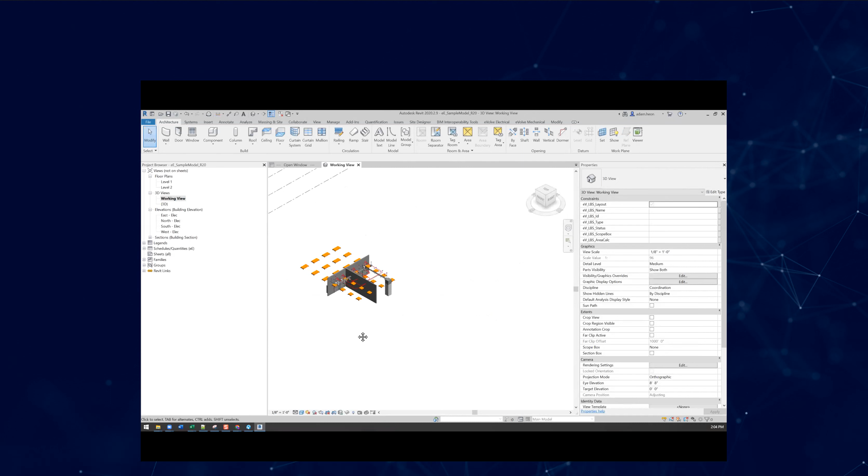The model that I'll be using is that sample model. I'll typically use this model just to show what some of the configs are as I'm using it, and point out some various settings and how you can use it. The nice thing about this zip folder - we'll probably have to put an update date on this, or a revision, because we'll update this maybe monthly or every 6 weeks or so, since we're always trying to build out samples and new things. So if we can share those examples with everyone, I think it's a good method to do that.

All right, so getting started. One thing you'll notice here is the Foresite properties has changed with 6.0. There's a couple of new panels down here, the materials and locations. So these are the two things I'm going to specifically go through, and I'll show how the website utilizes those tools and so on.

So where we start is in the website. What I'm going to do is start a new project.

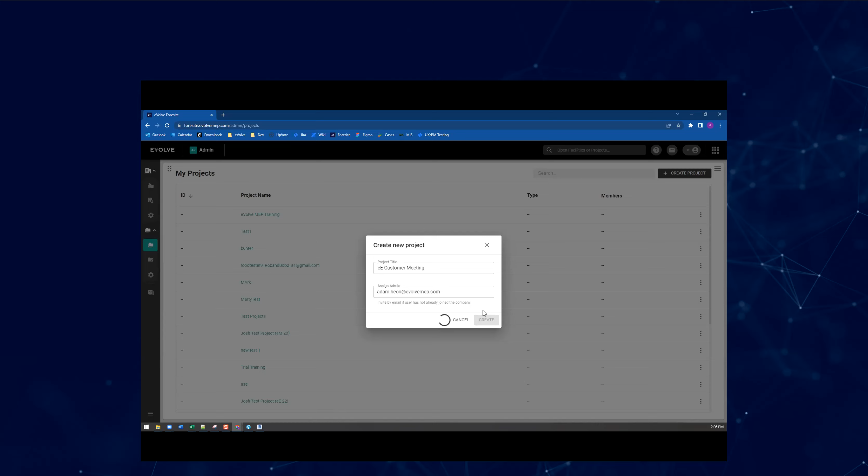All right, so what I can do here is go to the eE customer meeting. I can go up to this top drop down here to activate that project, and then I will go to the design module.

Anybody who has a Revit license automatically gets this design module up here with these nav items. The design module is basically the module for Revit users. It's going to have various types of tools we develop. Each different module contains a series of tools that talk back and forth, and some of those tools are redundant across different modules. So this is one of them.

This is basically the Revit users area. It'll be very similar to what you saw in admin, where I have some company information and project information. Below that is where you get into the specific tools. Again, this is more like our initial release. As we go through, every couple of weeks, 2 to 4 weeks, we'll be pushing updates to this, so you'll start seeing new features coming in here. I'll utilize meetings like this to bring everyone's attention to it.

Right now we have, like I said before, the materials and locations options here, and I'll show how those come together. So I'll jump over to my locations module or nav item.

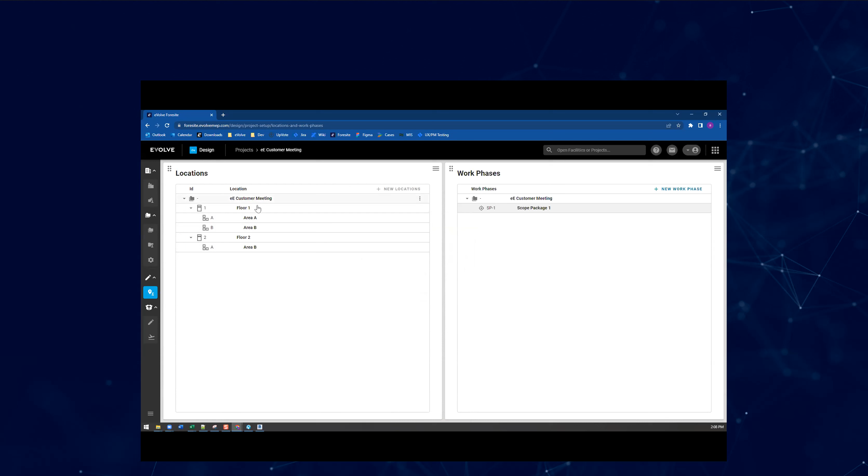So what I'll do is create a real basic one where I'll have floor 1 and floor 2, and I'll put an area A there and an area B here, and so on. The basic idea is you just create these parent-child rows. They're geared towards floors and areas and things like that you'd use in construction. But you get the idea - this could be as granular as you want, down to the room level. But just to get the point across, I'll create a simple 2-floor building, area A and B.

This one could use a... oh, let's see what I did. B. Okay, so I have the breakdown structure here.

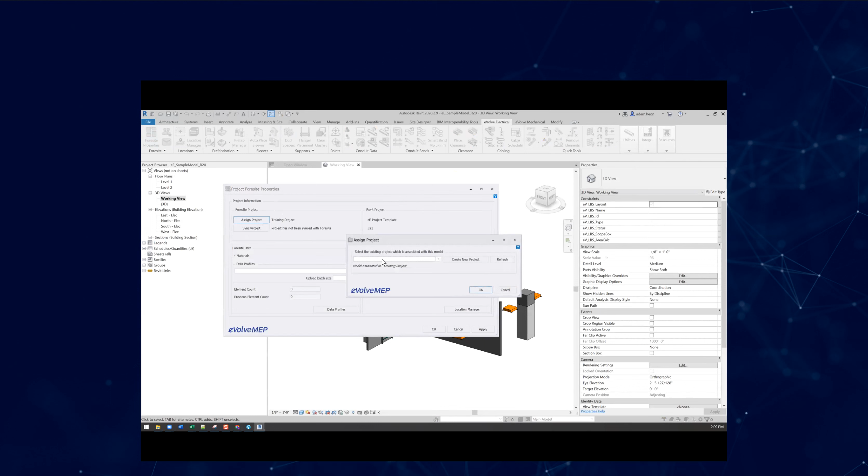Once this is created, I can bring this structure into the Revit project and start linking my locations within that model. So what that looks like is when I'm in my Foresite project, the first thing I need to do is assign my model with that new project I just made, which is right here.

I'm going to shut off my materials panel because I'm not going to use that right now. I'm just going to deal with this one, apply my changes, and sync the project.

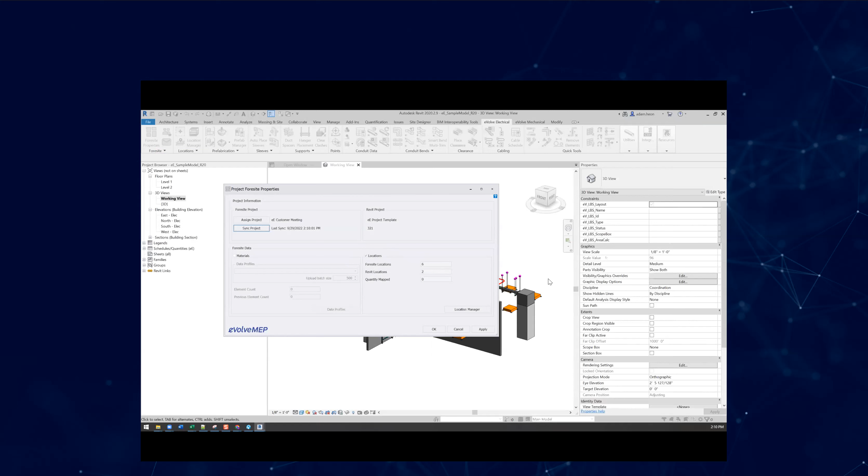So basically what I did is bring that structure into the model, and you'll see it lists out how many location nodes you brought in. It also displays how many are in the model and how many are mapped. So the locations that came in are 6. If I go back to the site, you see 1, 2, 3, 4, 5, 6 - basically each node is a location. The Revit locations are 2, so in this sample model I just have 2 of the square little location nodes, location boxes placed in the model. That's what that number represents.

Quantity mapped is basically how many of these are connected. The way you connect the two is you go into your location manager. You'll see there's my B1, C1 location, and I have a column here called Foresite locations. So when I drop this down, I see a representation of that same structure.

In this example, I can say, okay, that's B, and I have C1, and I'll just call this A. So I'm just connecting the dots, saying I have a boundary established in my model, and it's part of some location structure of this project. The website facilitates the creation of that structure, and we're just aligning the two here.

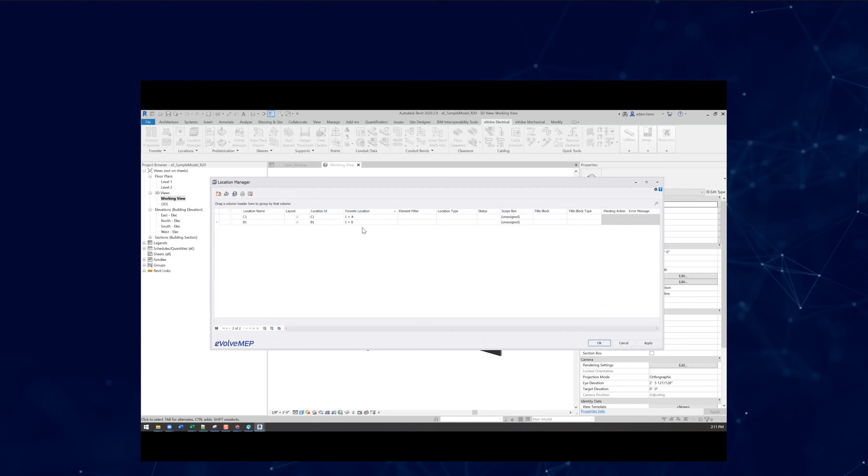So once I hit OK, you'll see it'll say I have 2 mapped. One thing we didn't automate is the assigning, because it allows you to be very versatile on the Revit side - you can call these locations whatever you want. So it just gives it that more manual alignment here.

So what I want to do now is basically do an assign location. This will just assign all the elements within those boxes.

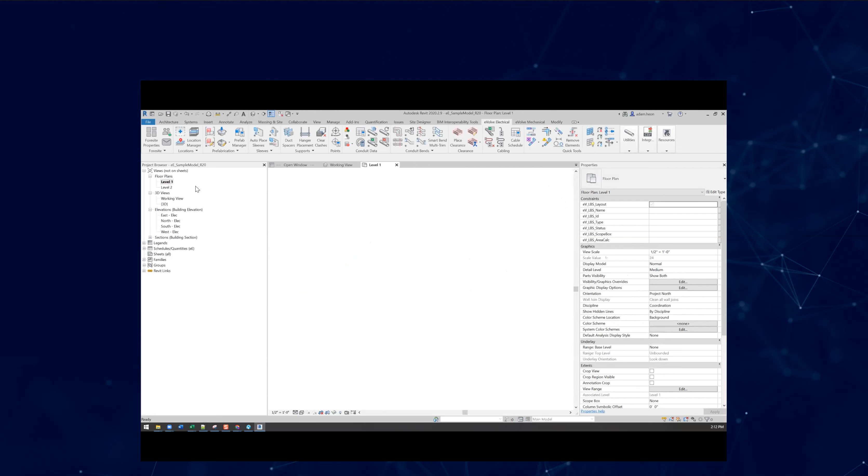I'll jump to the floor plan view once this is done. Can you see those? So there's one of those, and there's the other one. You can see them in my 3D view. You can't, actually, I have them turned off.

But if I click on an element, what you'll see is we have two project parameters here. The LBS ID, which is the identifier you called the location box, and then your Foresite ID, which you can see is that same location structure typed out. This is just written to the elements for additional filtering or tagging.

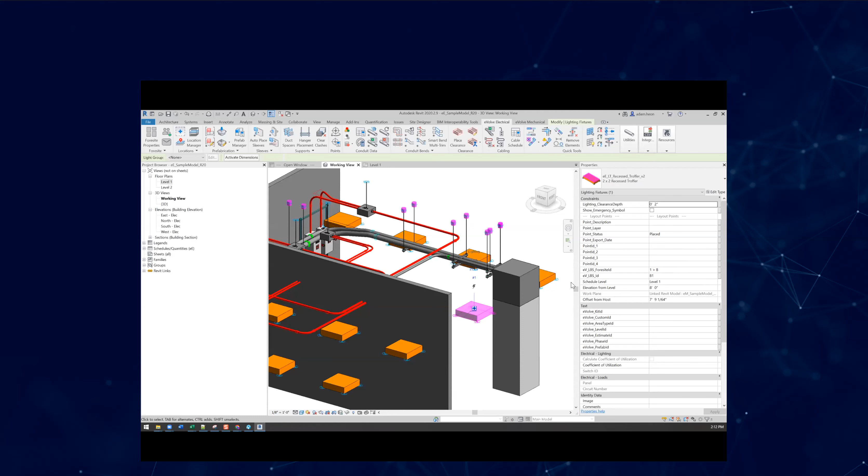So I have my locations assigned, and then I have all the locations mapped. So the next piece is the materials module, which is represented in the takeoff nav item here. We're calling this a takeoff pad, or the takeoff nav item.

Basically, it's going to be a series of tools to do various takeoff functions. One of those things is taking Revit information as far as quantity takeoff and processing through it. So if you wanted to export a list of your underground conduit, you can get those quantities into this area, move them over into a takeoff pad, and start working the quantities, rounding them up and doing that type of thing.

So there'll be a lot of tools coming in, but the initial release of this feature basically will pull the data from Revit and populate it in a grid. You can start to organize it a little bit, but there are still some features that aren't all there yet. So it's really just bringing the data in at this point. I'll show you what that looks like here.

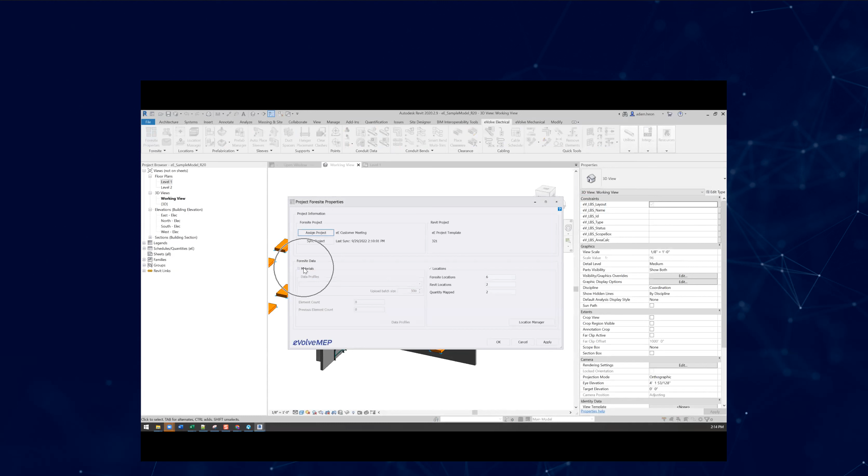The way we do this, we jump to this module and turn on the materials panel. You'll see we use data profiles. Last customer update, I went through a bunch of this with the profiles and how that's put together, so I'll touch on it again for those who weren't there, but won't spend too much time on it. Basically, you can assign one or more profiles to this config here, and then when you do a sync project, it will bring the data in.

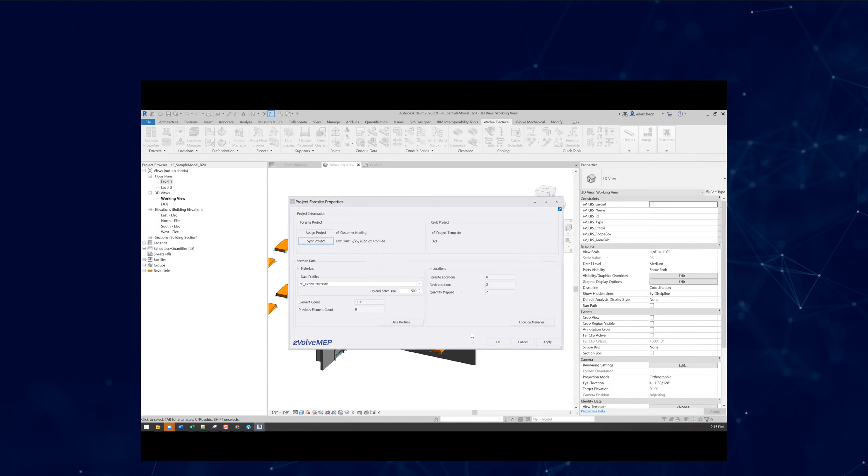So I'll sync the project now. Oops, save my changes. I'll sync the project, and then I'll actually do a couple of things with the profile so you can see how you can align some parameter data from the elements to the website. That's successful, hit OK.

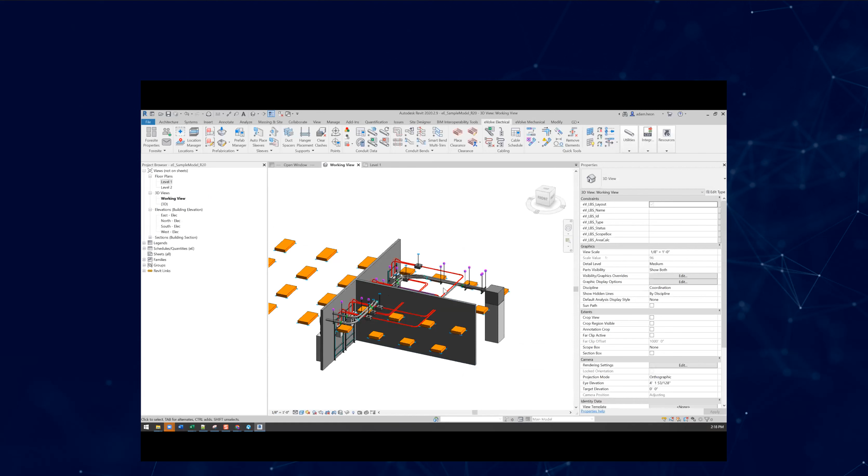So hopefully that makes sense, and you can start to see some of this functionality that we've been talking about over the last couple of months start to come in. So what I want to do is jump back to the model and start tweaking some of the information.

I'll take an example for hangers that I was thinking of today. Let's say you had some custom hangers, or you want to create a unique profile for hangers because it has some different information you want to capture. So what I'll do is modify this profile so we can separate these out, and then I'll show some of the parameter sync things we've put together for our hangers that might be applicable.

So I'll jump into my data profiles and find my evolve material profile. Again, this is the one that's in the sample model. Everyone that opens up this model can be doing everything I'm doing right now. So I'll click on this evolve materials.

I'm going to copy it here and rename it. I'll call this material—actually I'll call this hanger assembly. Let's do it that way, and I'll keep this as is. So let me jump to my hanger assembly.

The big thing with a profile, just to cover some information from last time, there's two main parts. Think of it as a method to create a containment of elements within a model and then do something with it. A bunch of our tools are using profiles now, and this is one of them. Once you grasp the concept of the function and how you can specify what parameter information you want to use, it starts to really make sense, and you can start taking advantage of these tools. There's a lot you can do with them.

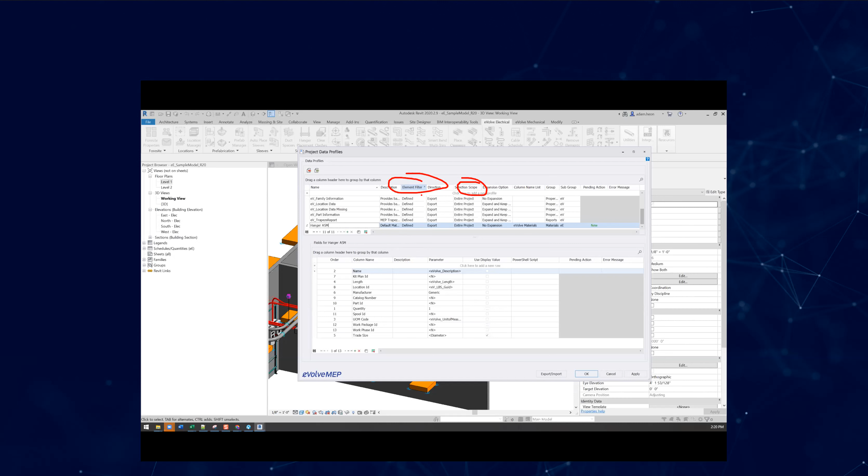But the two main parts are your element filter and basically your selection scope. The element filter obviously defines what you want. Selection scope basically defines where you want, or what exactly you want, what aspect of the project you want—entire project, by view, by selection, etc.

So for the element filter on this, what I'm going to do is—really don't need all that, just need my conduit fittings. I'll use evolve category, I think it's going to equal... to constant. Oops, I think it's under hangers. I should not need any of these. I'll do that for right now and see what I get.

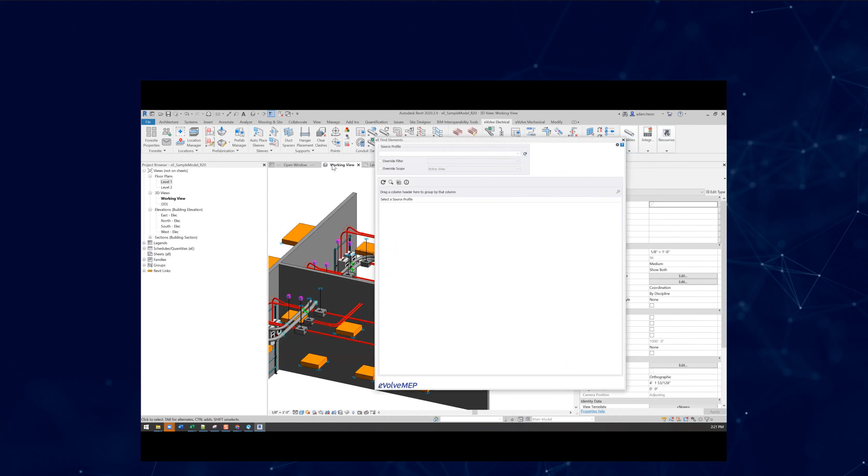So one way I can test this profile out is use our find elements feature. When you first open it, make sure you hit the refresh button so you capture all the profiles from the open project. This is a dockable pane, so that means you can have multiple projects open, and you got to make sure you're pulling the profiles from what's active.

So I'll find my hanger assembly here, and I'll just run the script. And there's all my assemblies—all the assemblies I captured that have hangers. What I don't want is these rod assemblies, I just want these trapeze ones here. So what I want to do is look for one more filter here that I can use.

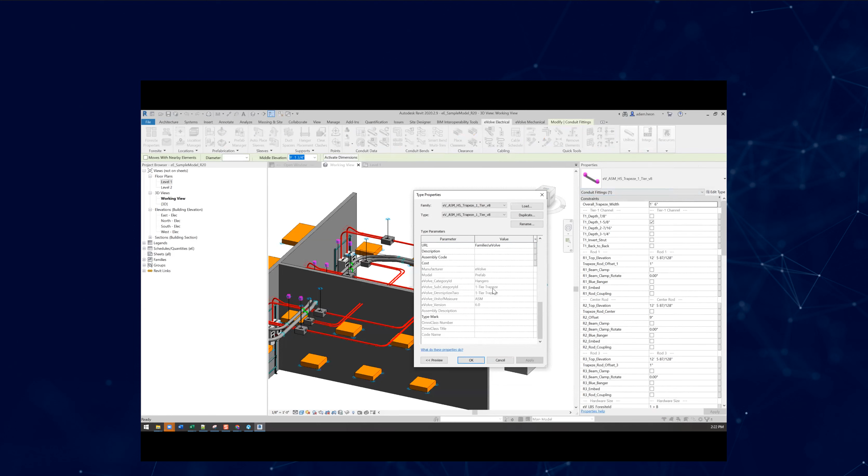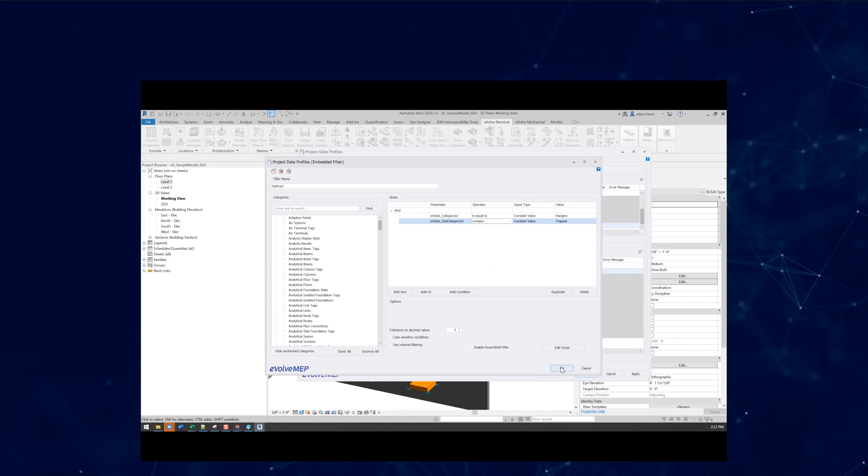Let's see, hangers will say subcategory contains the word trapeze. That'll narrow that search down. So I'll jump back into my element filter, add a condition for evolve subcategory trapeze, and we got to say contains. Alright, so I can jump back over to my tool here, just do another refresh, and there's my assemblies.

You can use the settings—I just, for whatever reason, closed out of it. You can use the settings sprocket here to jump right to the data profiles from that panel, so you don't have to close out of it like I was doing.

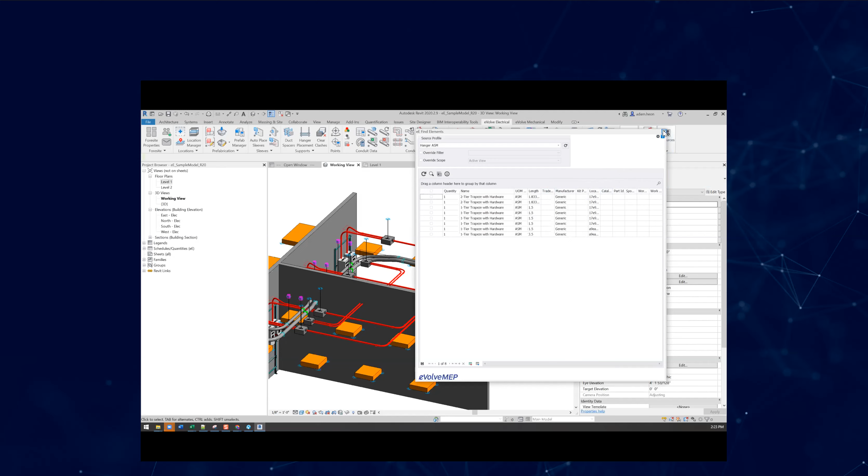Alright, so now that I know I've captured this, what I want to do is use my catalog number field and come up with a catalog number for my hanger assembly. A common method for fabricating trapeze hangers, or a lot of different types of standard components, is creating catalog numbers. The catalog numbers describe what the part is, the configuration of the part, and it helps you build it.

Think of a light fixture or any other tons of products, they have it. I always think of light fixtures because they have the same assembly codes for all the different options of your lights—what wattage, lamp style, and all that kind of stuff. Same concept—we actually created a sample script here in Parameter Sync that will create a catalog number for hangers.

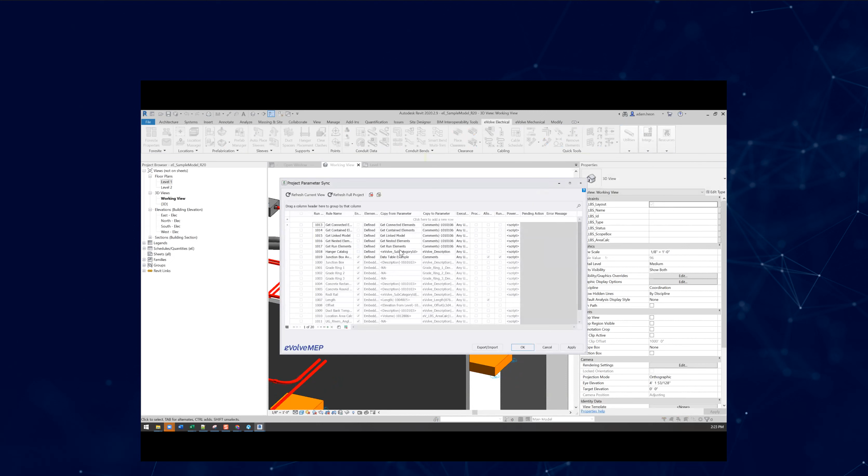So I'm going to write this to my evolve description parameter, and we'll take a look at the script real quick so I can show what that looks like.

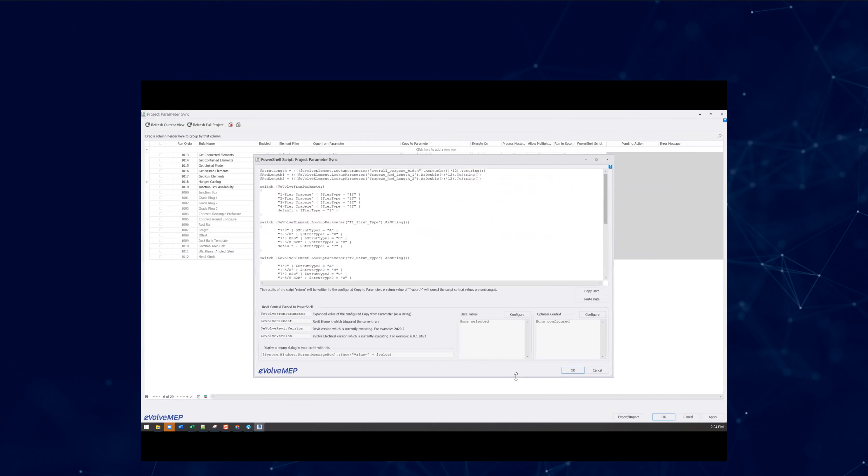Basically, we're utilizing PowerShell here to grab a few variables from the family, rod lengths, trapeze width, and we created a series of options here and defined what the nomenclature is going to be based on different values.

In order to do this effectively and not have some crazy thing going on, you've got to standardize, or at least the more you standardize, the simpler this can be. This is a definitely overly simplified version of it.

Again, it's really just a matter of how many different options you want and how many available sizes or options are within that. The idea here is I'm taking a strut type, here's all my different strut sizes, and this is the nomenclature it's going to be. So if I have a 1 5/8 trapeze, it's going to have a letter B in the name.

Then I get into the bottom here where I'm basically stringing together all these different values. So this determines your end catalog number. You can kind of read through this: tier type, strut type, strut type 1, strut type 2, strut type 3, etc. Then you get into your length and your hardware, your rod lengths. This would be unique per company, but again, it's a good example here.

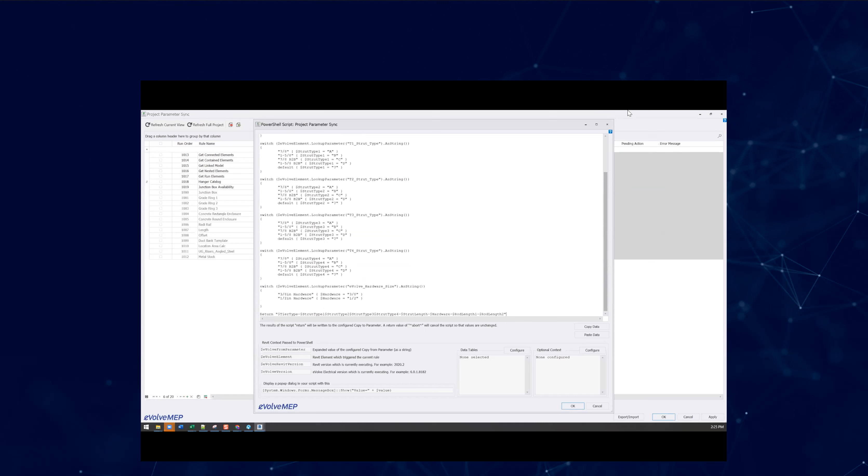So hopefully when you get a chance to look at the sample model and look through this, maybe you can utilize it. And if not on hangers, you could do it on any family. So anyway, I have this parameter sync. I'm going to enable this and then apply my changes and refresh my project.

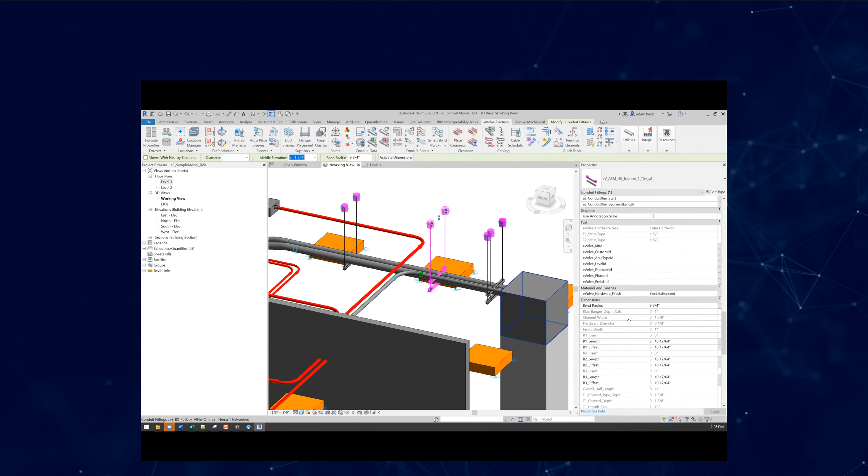Now when I click on a hanger, I'll just double check my evolve description. Did I go by it? There it is, evolve description.

So actually, so funny, my rod lengths here are coming in as a fraction. This is decimal feet, so it's coming in at fraction inches, or decimal inches, I don't know, looks like decimal inches. Yeah, 46. One thing you can do, you could definitely modify the script to fix that.

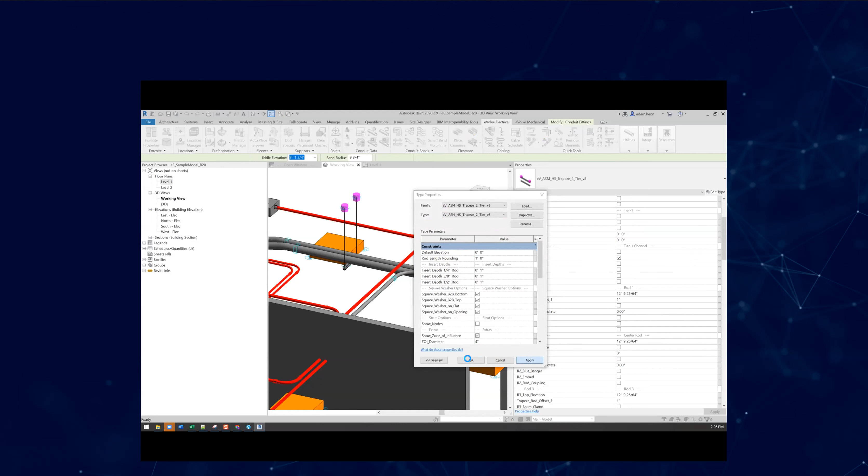But a nice feature in our families is we have a rod rounding length. So if I wanted to round to the nearest foot on the rods, hit OK here. It should actually trigger the script to run. We'll see, may have to do a refresh.

Let me just do a quick refresh on the sync rule. So I'll select my hanger catalog. There we go, 48, 48.

So this is a 2-tier trapeze, BB. I think 1 5/8 for both of those. 22, I forget what that is, might be hardware or something. And then you have 48, 48 for the rod lengths.

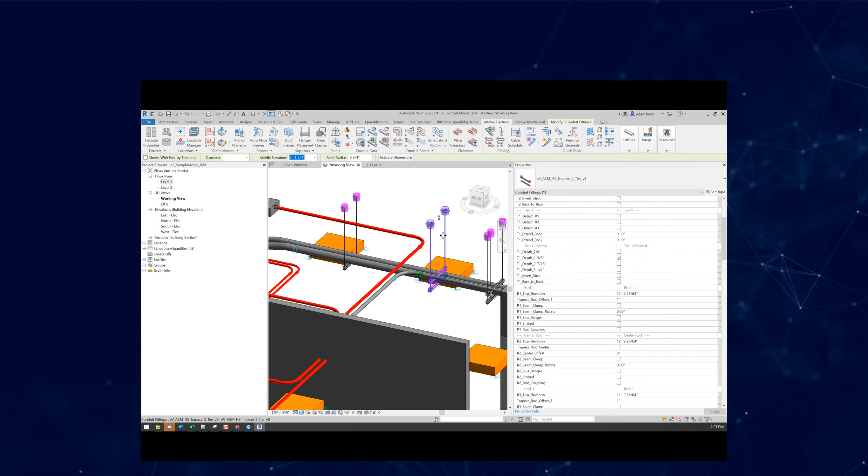So again, the purpose of this is I want to send an itemized count to my takeoff pad with these catalog numbers. So I'm going to jump back to my profile.

And for catalog number, the parameter I want to use is evolve description. And for my name, I want evolve subcategory, maybe subcategory ID. Put it in brackets.

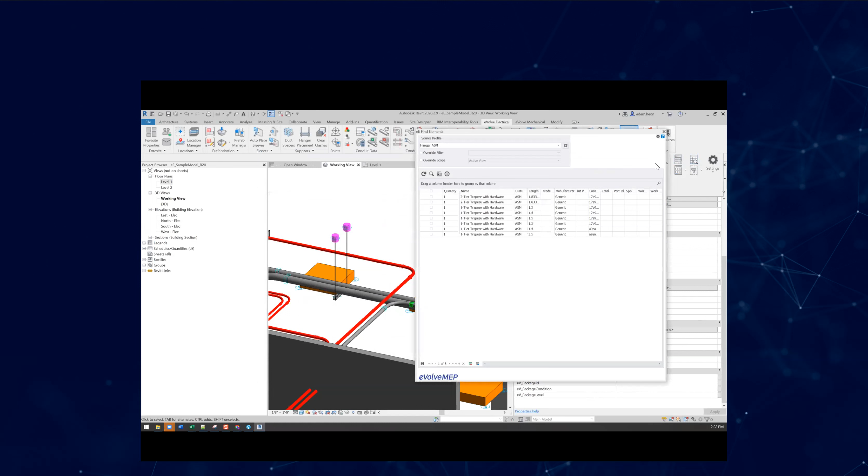So what I will do to test this out is go back to my find elements feature, refresh this. Oh, I typed in the name wrong there, but I want to look for my catalog number right here. And now I'm getting my different catalogs.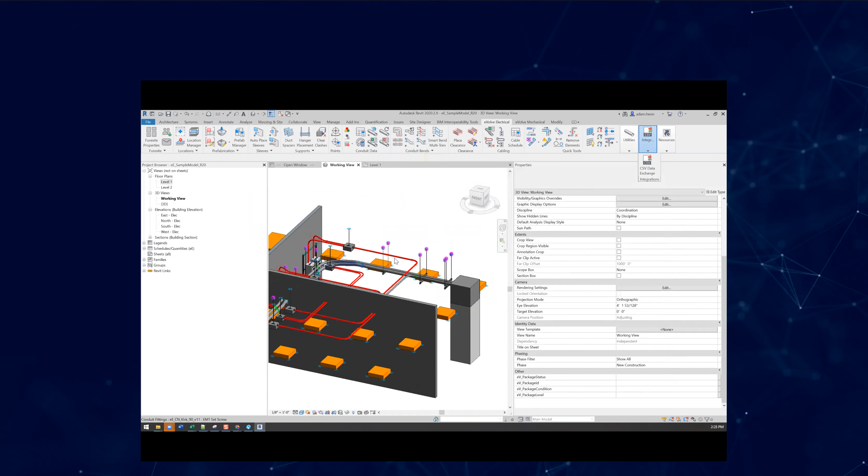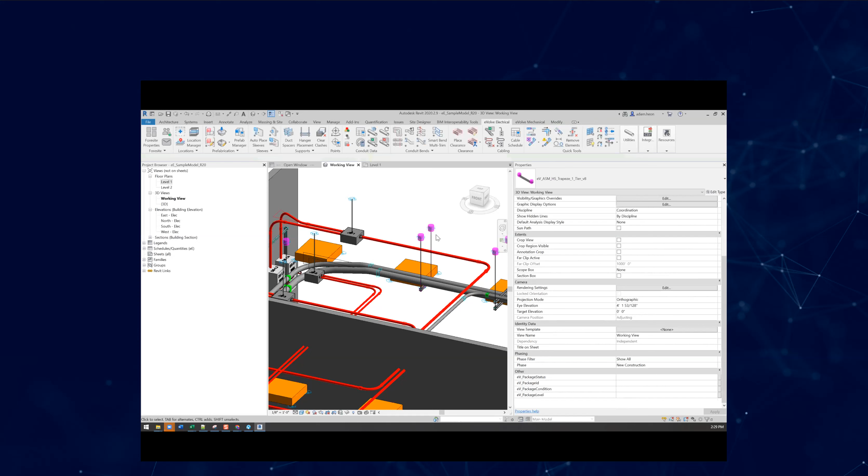I guess my 1-tier, I did not update those, but I will do that right now just to get it nice and clean. My rod rounding, 1 foot. Process through these, and I'm just going to select them all and bump them real quick, just refresh them. There we go.

And I will go back and fix my typo. Oh, so it's not in brackets, that's why it returned that. So I should just be able to select that, hit OK, jump back to my find elements. I don't know why I keep closing it. There we go. 2-tier, 1-tier. All right.

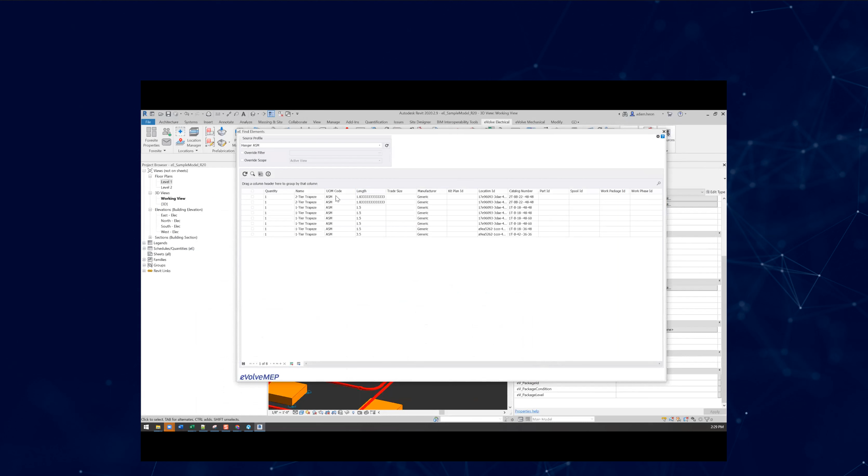So I've reconfigured my profile. I basically just put a catalog number. You'll see when I jump back to the table here, I don't have those catalog numbers or anything like that. One thing I will also do is our unit of measure code just has to equal each. So I'll just hard code that as each and hit OK.

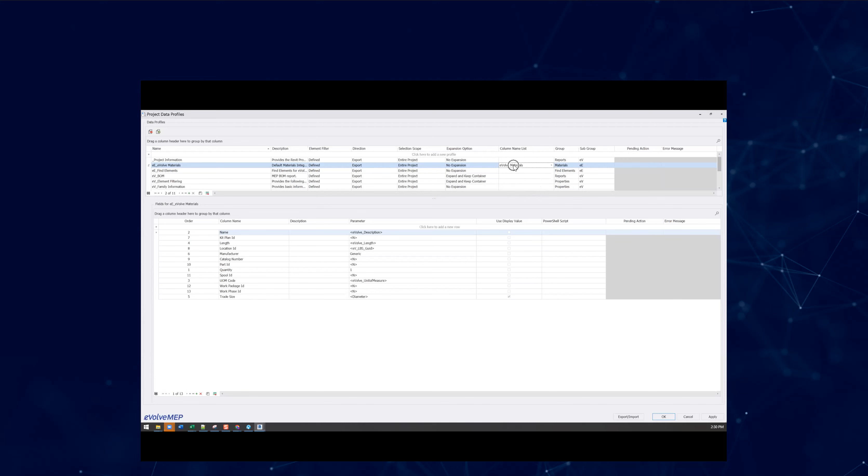All right, so I got that configured. I'm going to go back to my Foresite properties and add my hanger assembly profile. What I probably didn't mention, when I drop this down, you see there's just 2 profiles available, even though in my model I have a lot of profiles. What puts a profile available here is the column name list column. This is where you define your integration. If we don't have any integrations on the electrical side, mechanical, we have the pipe server one, that's where it shows up. But by defining evolve materials here, it puts it into the list over here. So I'm going to hit apply, and sync this one more time.

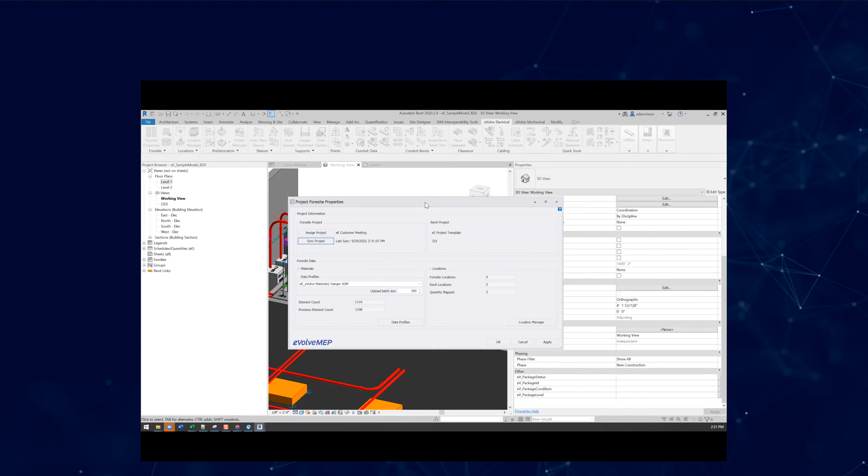All right, so you'll see the element count went up because I was actually filtering out the assemblies in my first upload, so the count did change. But we'll jump back over to the website here. There's my trapeze, there's my catalog numbers. So again, this is just showing how the data is going to be mapped and pushed.

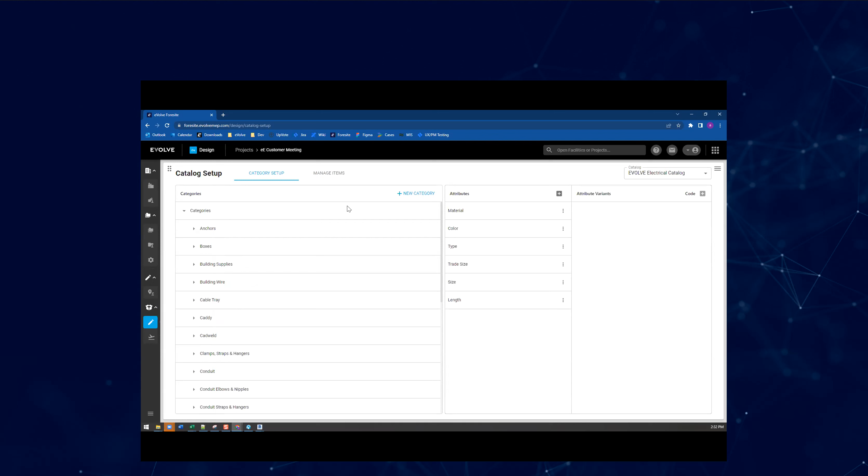What we will also be doing is building out a catalog. I believe the catalog is available to everybody as well, so we have an electrical and mechanical one. This electrical one, if anyone saw the materials Gen 1 product from a few months back, I think there's 20 to 30,000 items in it. I believe this is that catalog, but it's just getting rebuilt. What we'll be doing, like we did in the previous version, is start aligning the content so you can start mapping product information or product specific information to the Revit elements. This is available, so again, you can go in here and tinker with it for what features are available. That's kind of how this will be connected.

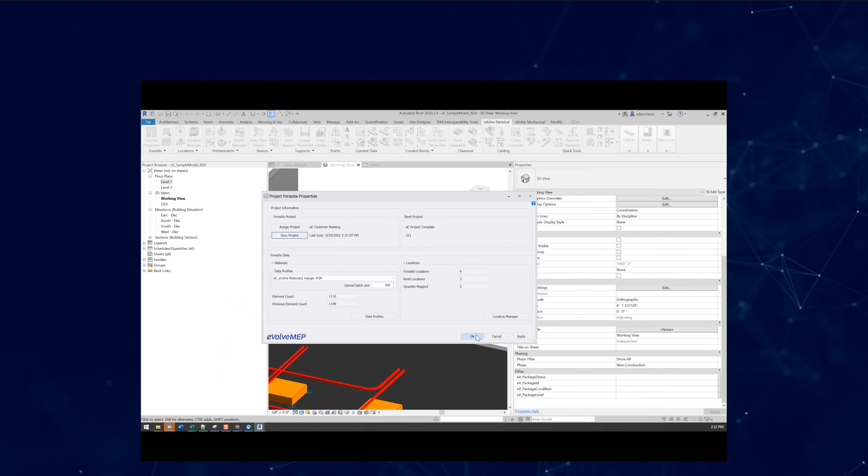So that's really what I wanted to cover, to show how the website is being developed, what kind of things are coming online, and how you can start utilizing some of these tools today and actually start seeing that and using it. I'll open it up for questions if there are any, or any other topics that anybody would want to cover, or any utilities or tools. Got a little bit more time, so we can cover whatever anybody wants.

Questions so far. You guys can't let the mechanical people from yesterday's webinar beat you though, they had a bunch of questions. 30 or 40.

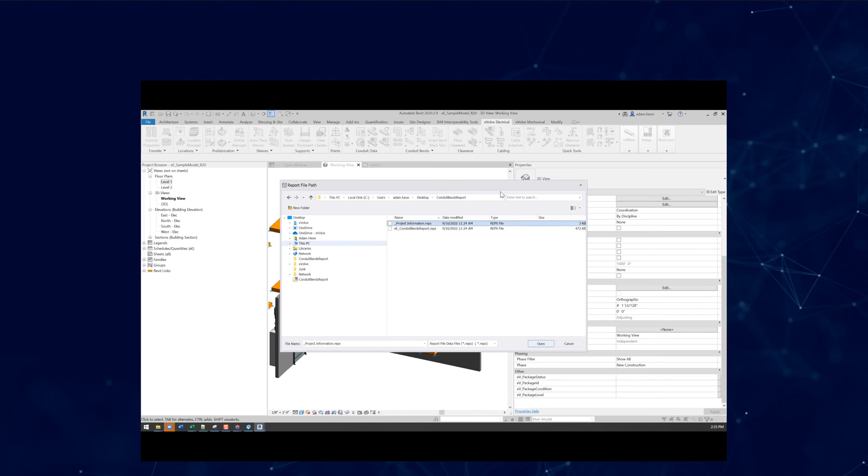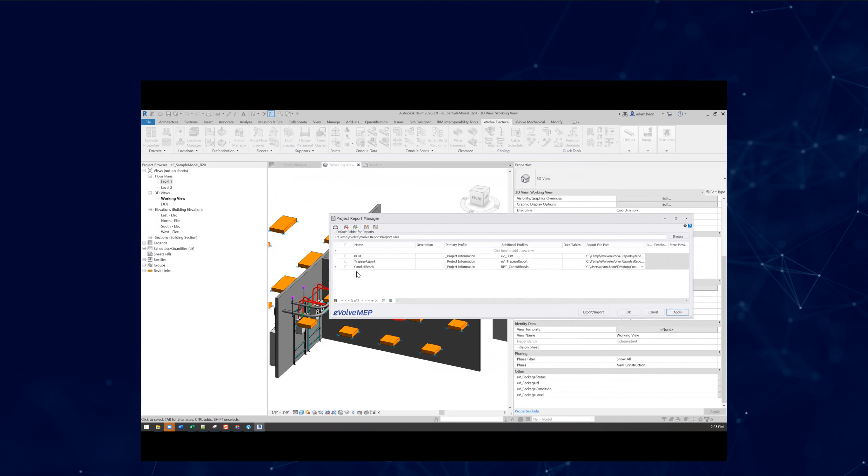One thing I'll show is our conduit bend report that we're putting together. One of the next updates to the sample files will contain this report. Let me point to the right place here... and some profiles, bear with me while I bring this up. And I think that should do it.

So it's just another sample report that we'll throw together, again pulling in the legends. They're not being pulled in from the legends view, they're image files of the same legends. But this will provide a bend report by bend type, and you can get it down from bend type to a location as well. Carrie's been working on these reports, put in a few more options up here for on the fly regrouping of the report data, which is really cool. So there'll be even some additional changes from what you see here.

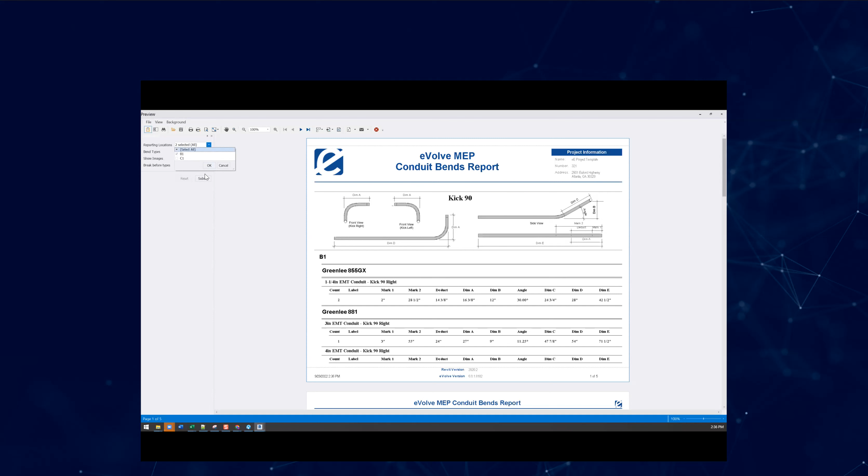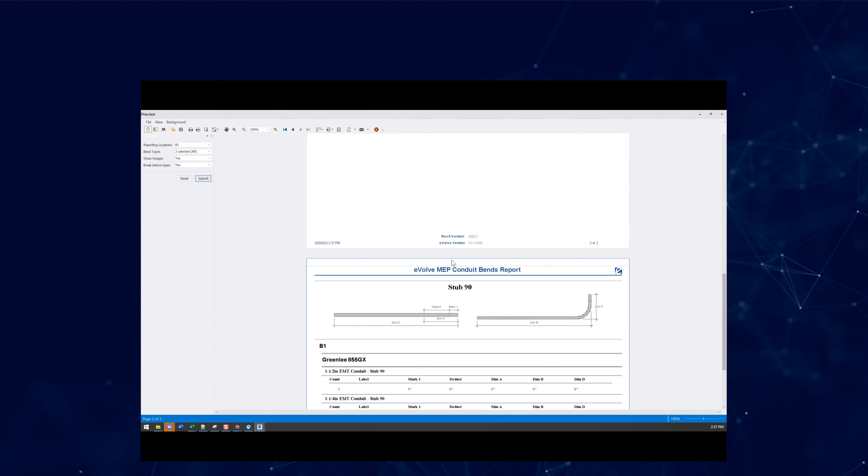But what you can do up here is do your reporting by location, so you can change location, hit submit, filters it down. You can put page breaks so there's no overlap, so you see how it kind of bleeds from one bend to another. You could submit that, so now there'll just be a clean page break. So again, just putting in some things here that show you what's possible with these reports.

Can we generate prefab builds using Foresight, like the sample reports within Revit?

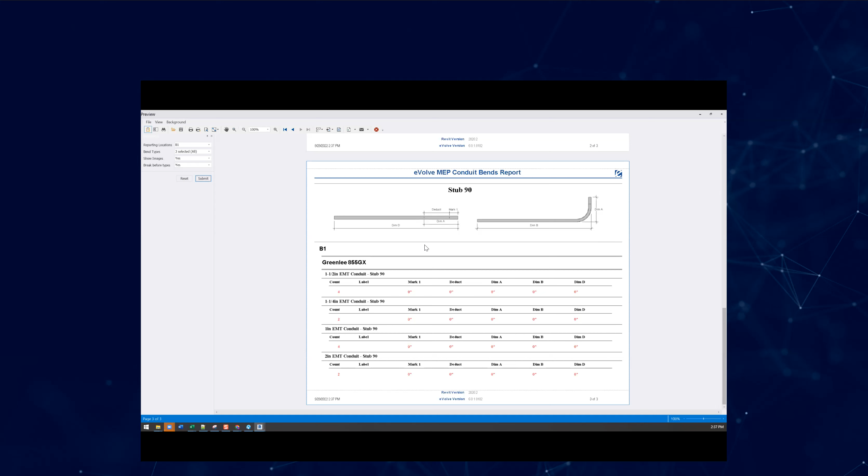Is that John? Maybe you can elaborate on the question. I'm not sure on the question, if you mean by prefab builds.

We will be able to put together bills of material and assembly lists and things like that, and turn those into work orders for prefab and stuff like that. So we'll be able to do that type of thing. I don't think we're going to necessarily have a reporting function like this as a tool on the website, but hopefully that answers the question. Cool, thanks.

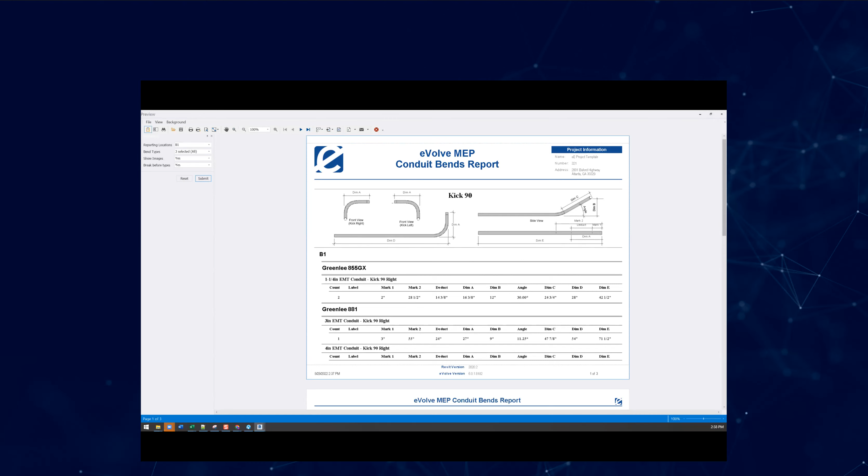Let's see, so I guess what I'll probably do for the next one, if anybody has topics they want covered, please send them in. You can send them to me directly or through support, you can always submit a support case through the ribbon here, or just send an email. What I'll probably end up doing is starting to do a mix of various features, covering how-to's, going over certain settings, just pick a few in different areas and keep pecking off the list. So that'll be the plan.

Let's see, one more question came in. So for PMs that don't have access to Revit, what license do they need? Yeah, it's a good question.

I forget exactly how we're going to bring some of these other modules online, but I'll look into that exactly. The idea there will be you'll be able to give access to these other modules. So in the example of a PM or a field foreman, how are they going to access this stuff? This would be another module that you'd be turning on, and they would have access to that. And if you jumped over to that module, there may be a takeoff nav item, and they would see the same information.

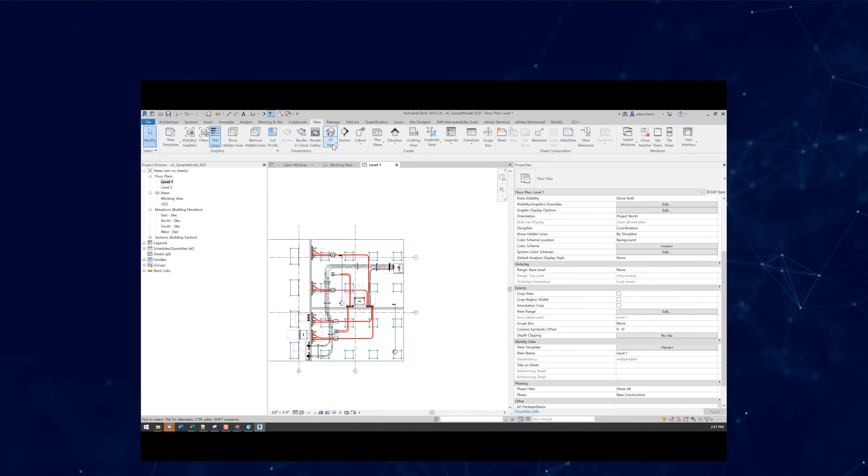Equipment, let me just see. So I don't want to see clearances in sections. So you're talking about the visibility graphics of the clearance, I believe - it's now right under generic models, and you can shut off the evolve clearance.

The clearance families - we redid a lot of the way our clearances were, and all the families, they're more - it's basically a universal family, and we did it so we could have more control over clearances and easier control. Hopefully this answers your question, Dave, to shut off the clearance by section view. If not, just let me know.

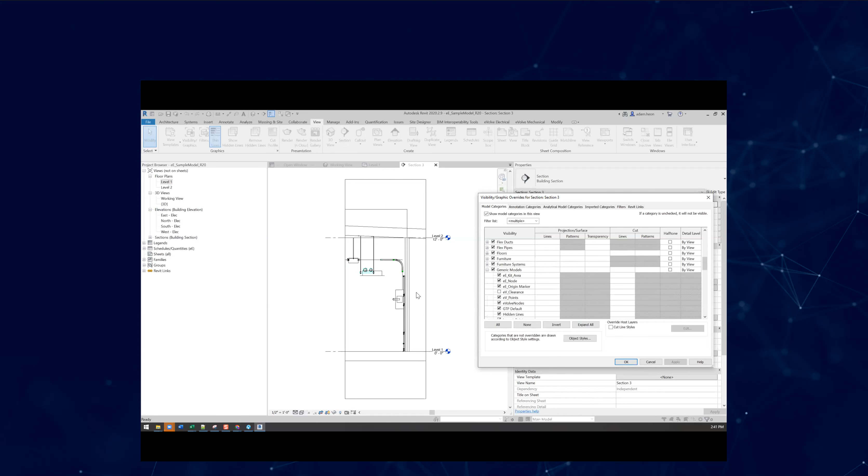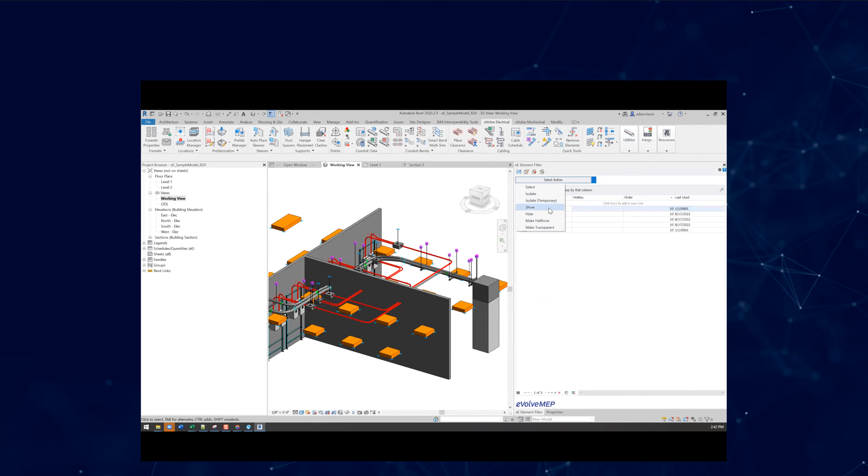But something else to touch on there, with the way it's created now, what you can actually do as well is use element filter. Let me just pop that in there. There is an evolve clearance filter where I can say show. Show. Oh, maybe it's calling me a liar.

Let me look at it. Oh, that's why, I don't know why that's like that. Generic models... oops, conduits out of there. Come on. Evolve description, oh what is this? Position contains clearance - I think it's evolve category. There it is, oof, okay.

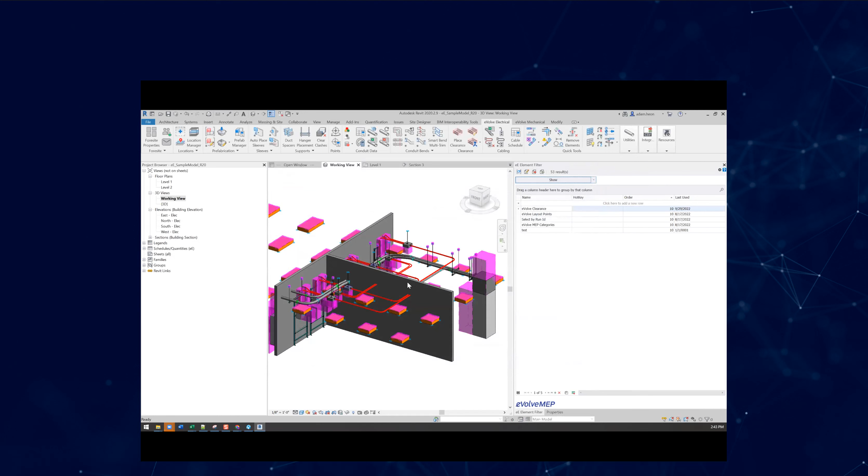So I can now use element filter to show and hide by view clearances. And the clearances also have additional parameter data in them.

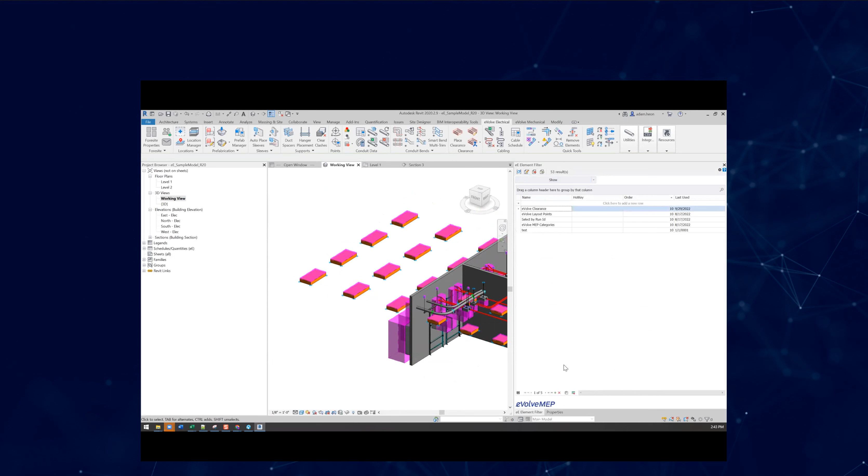So I believe the light fixtures, I can tab select this thing, subcategory lighting. So if I wanted to create an element filter for just lighting, I could come in here and duplicate that, call it lighting clearance, add a category or additional condition for evolve subcategory, I'll just say contains lighting. And now I can hide light fixture clearances, so I can individually control those, and I could just turn them all off.

Yeah, I'm not sure on that, Dave. I can reach out and take a look at it. I'm not sure if you're looking at something different there.

A couple other questions: do they need to buy a full version of Evolve Electrical to get access, or is there a lighter version? It's not going to be a Revit subscription. I don't know what the pricing model will be, whether it's like $50 a month to turn on certain modules. It's not the Revit product they need to buy. It's an additional monthly fee to turn on a module, basically per user.

We are bringing on a few other Lighthouse partners for beta testing this as we start going live. So if you're interested, you can reach out to me.

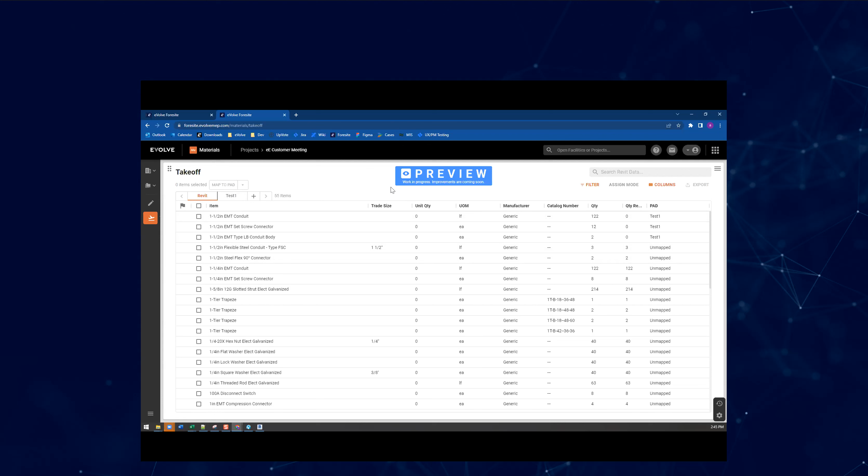And how do we get access to the field module? That's something I can follow up on next month regarding the release plan for these. Some may come online earlier than I know, but I'm not really sure exactly what the release plan is. What you'll see is this design module, and more likely additional features coming out that will also be in the field modules. But you'll probably see more of this developed before those other ones come online.

All right, give it another couple minutes, and if anything else comes up, try to think of anything worth noting in the sample file.

Oh, one thing to point out - I've been on a few calls and wanted to point this out with Element Filter, a way to use it that hopefully expands on how you think of some of these tools and how they're layered and why. So let's say, Colorizer, pick a tool that uses Element Filter.

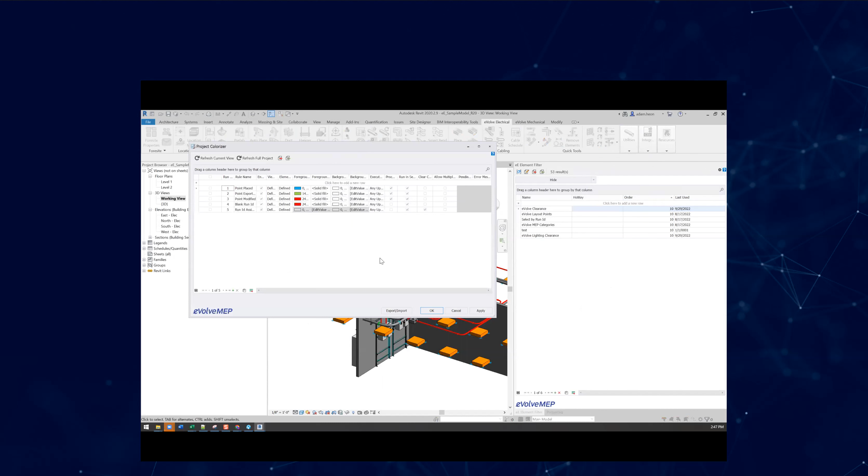So I want to color light fixtures, for example, or actually I'll use a different example, parameter sync. So I've got a rule I'm going to make here, writing it to apply to all my elements in my project, and there's always a group of elements I have to select.

So typically what you're doing is jumping into your element filter and finding conduit, scrolling down - oh, there's conduit fittings, there's conduits - typing in, finding equipment. You could spend a minute or so navigating through the dozen categories you need. So another method is using copy from existing.

What you can do in the actual element filter tool is create element filters that maybe you don't even use as element filters, but as starting points in other tools. An example would be this Evolve MEP categories. I'll bring it in here using copy from existing. It'll warn you it's going to wipe everything out if you do this.

So I'll pick my categories - you'll see the list here is the same list over here, so I can take any of them, just grab it. Let's clear this out. You'll see automatically I pull in a dozen categories all checked off. Obviously I could also have conditions in here as well. So when I bring that in, all that comes in by default.

But it's a quick way to fill that out. Let me just cancel it and show what it would look like doing it quick. Grab my category, hit OK, there's all my stuff, add a condition, say comments - I could write those conditions there, hit OK. And I can write some value to comments, and push that out.

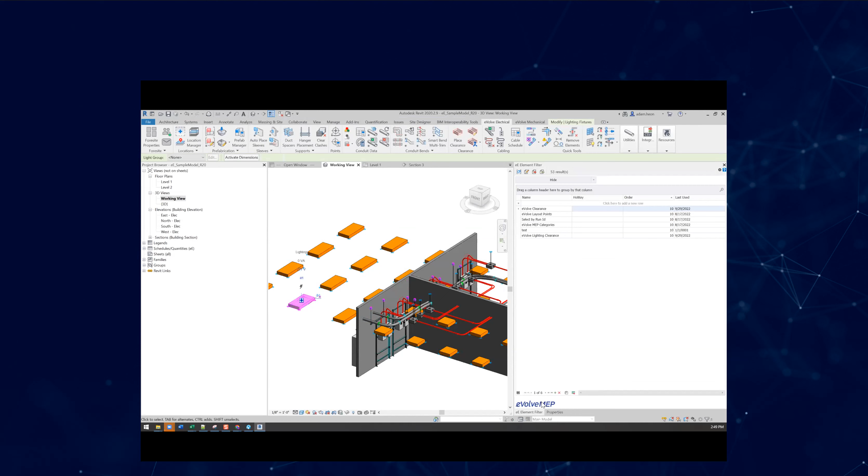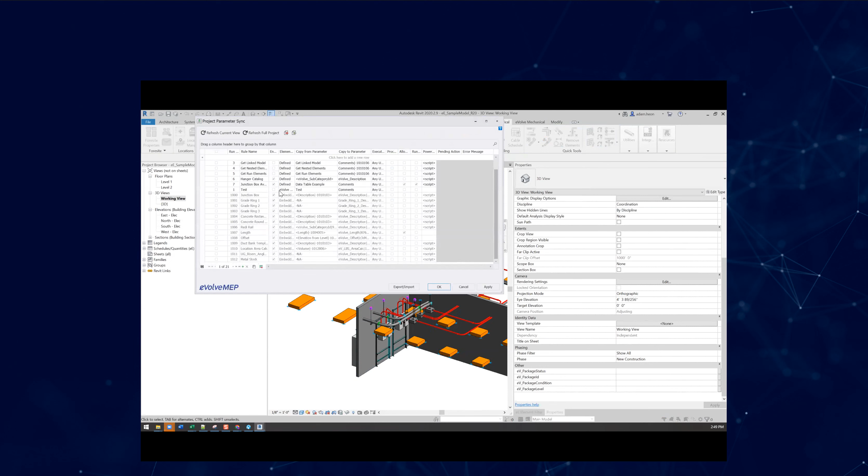So then as I click my light fixture and bump it - oops, there it is. Oh, I don't know why I didn't go to comments, but that was the idea - just a way to quickly bring element filter rules into tools. Hopefully that made sense. Oh, I didn't enable it, that's why. There it is, test.

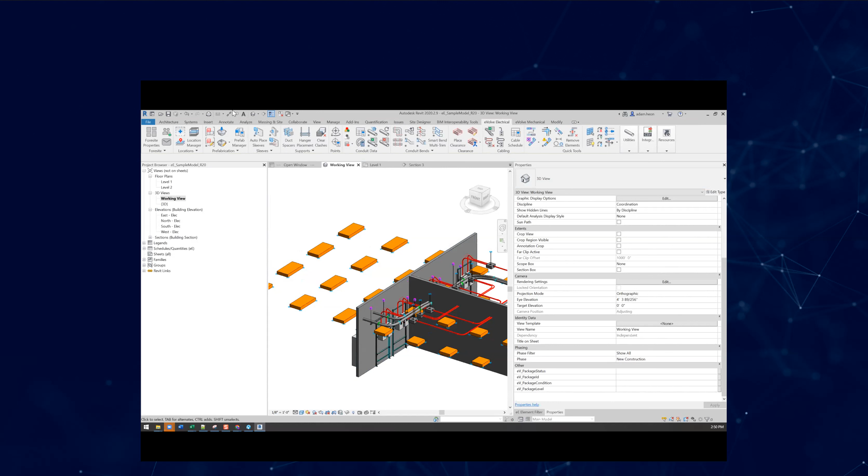Thanks, Adam. We'll talk to you soon. Thanks, we're going. Bye.